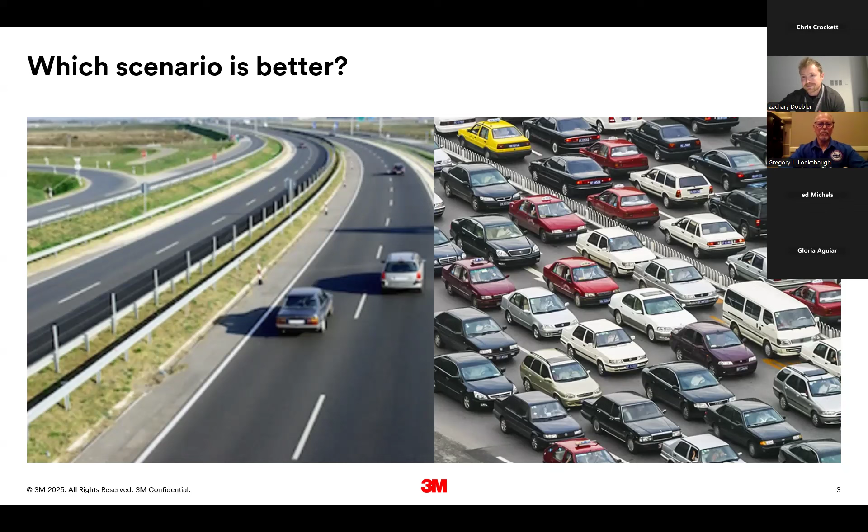So the takeaway there is that traffic has a lot of synergy to chemical management. I've had the opportunity to travel the country over the last month and a half in many different parts of the country, and traffic specifically is something that resonated with me and this topic of chemical management. Now, this picture's fun, more just to get a chuckle out of the audience here.

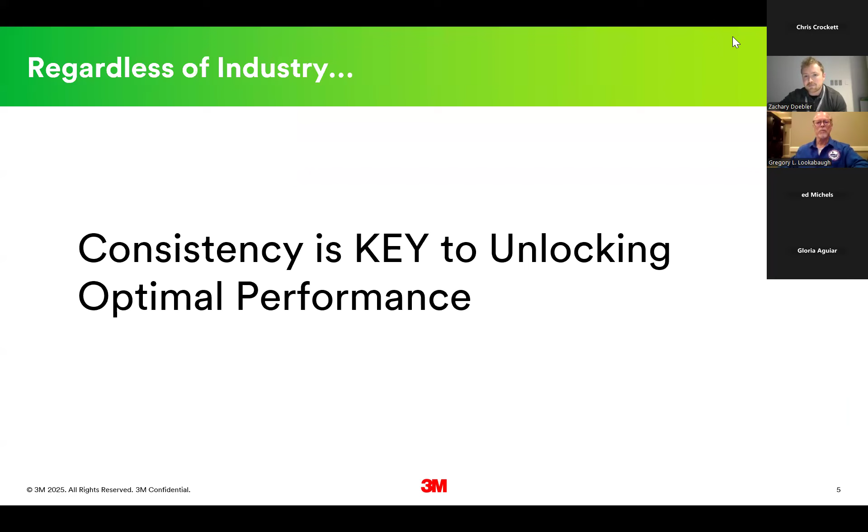When we impact water pressure, things happen. Performance changes. So ultimately, I have this noodling in the back of our mind. Consistency is key to unlocking optimal performance. No matter the solution that you have, no matter the operation that you're experiencing, consistency is key. And so when we're talking about chemical management, we're talking about cleaning. We're talking about cleaning chemicals and disinfectants, another big hot topic.

From our perspective, the manufacturer's perspective at 3M, and from an application engineering perspective of going to talk with your customers and learn what's working with them, we're constantly hearing that they're getting inundated. Customers are getting inundated with, here's the new disinfectant. Here's my more effective cleaning product. Here's my more sustainable solution. Oh, this product's going to be improving your handling or your experience. We're also hearing there's a lot of labor challenges.

Now, these are all great and dandy, and by human nature, new is something that we're always going to gravitate towards. Improved, those are just kind of trigger words in that instance. And in some instances, we do need new and we need improved solutions. But I would like us to all consider when it comes to cleaning, when it comes to chemical management, why are our current solutions not meeting our needs?

Now, when we think about the current solutions we're using, why are we using them? The soils that are out there today, I guarantee, are the same as they were a decade ago. The dirt is probably similar. The soap scum in your bathroom, probably similar. The mineral scale is probably similar. The cell structure of the microbes that we're experiencing on this earth, they're most likely going to be very similar. So why are our current solutions not meeting the needs? Why is my floor cleaner not cleaning as effectively as when I was sold on it or when it was showcased to be working?

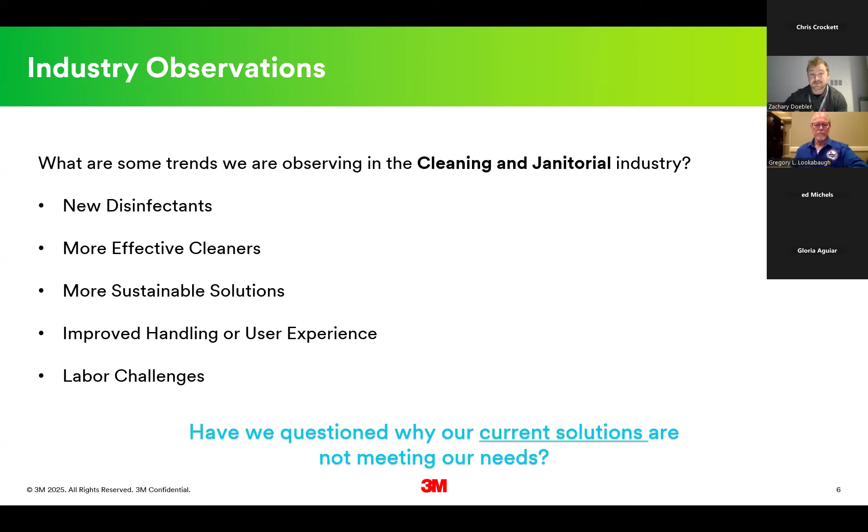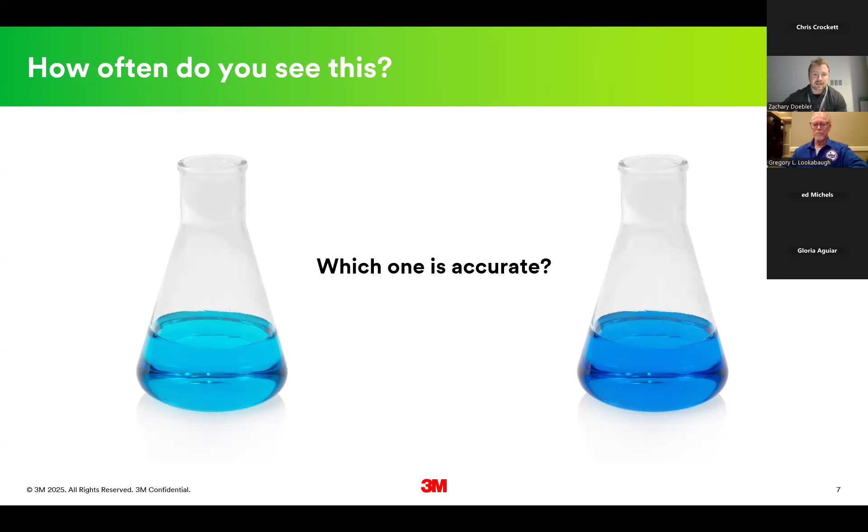Qualitatively, by the naked eye, we know something's not right. We know something's not being influenced correctly. And most likely that's related to the accuracy of your chemical management system. It's not working the same on day one as it is day two, as it is day three, as it is down the road or a year later. And why is that the case? We need to understand, and it's something that we really like to advocate for our customers, that the accuracy of your diluted solution is your key to success.

If you can control and have an accurate dilution, you can plan on the spending, the procurement, the yield of the chemistries you can have. Your compliance, you're going to have that peace of mind that you're going to be meeting those EPA specifications to kill the germs that are needed. Your efficiency is going to be planned. It's going to be improved, because you can plan on that product working as it did when it was sold to you.

And from a sustainability perspective, you're not wasting chemical. You're not having to use too much. You're not having to use too much water. Maybe you're not going through as much product, so you're reducing the carbon footprint of shipping product into your facility or bottles in the environment. Accuracy is so important when it comes to chemical management.

Your chemical management dispenser, if we had to compare it to an employee, it's an employee that you want to show up. It's an employee you want to do its job. You want it to work appropriately. If that employee didn't show up and did a job that was half of what it was supposed to do, you'd have problems. You'd consider, why am I having this person in my facility?

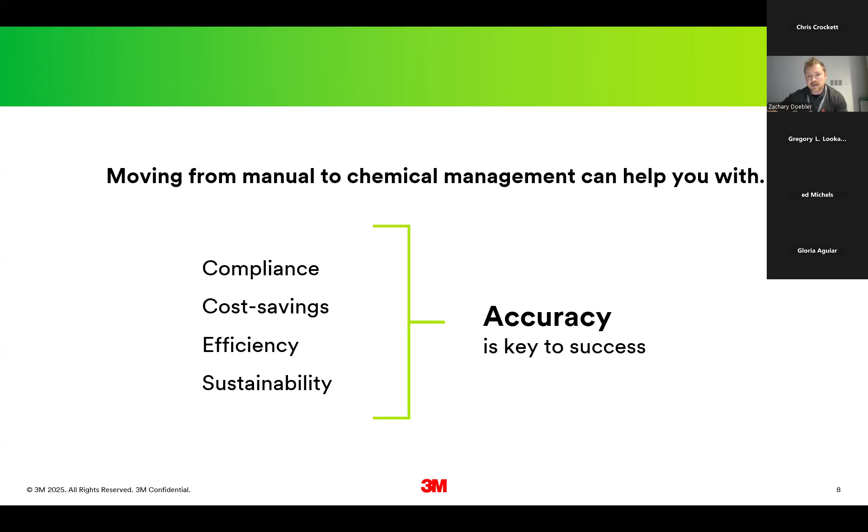If we think about that methodology with your chemical management system, the same spirit is true. At 3M, we're really of the mindset that if your solution's not diluted appropriately, what's the point? You could pay the surgeon the most money in the world if you're a healthcare institution, and they could be doing the best job they can. But if they're not cleaning appropriately, again, what is the point? And a lot of that comes back to your diluted solutions need to be at that proper prescribed dilution or concentration in order to clean that facility for you.

Now, there's things working against your chemical management system. There's things working against us when it comes to cleaning. The spirit of chemical management: one, avoid direct concentrate exposure, and two, control the dilution so we don't have that junior chemist mentality happening within a facility. We want this dispenser to deliver a diluted solution so you can worry about cleaning your day to day and not what or how much do I need to put in here.

Now, I mentioned there's factors that are going against us here, and the biggest one is water pressure or water flow. So the building design, the location of the dispenser in that building, your water source, the age of your plumbing, distance to the water supply, the capacity of your building, how many toilets are being flushed at one time, or how many sinks are being turned on. All of these things can impact your water flow.

Now, if you've been in a hotel recently, you're definitely going to know this, but even at home, when you're in the shower and you notice that water flow or water pressure change, it's pretty frequent. And sometimes it can relate to temperature change. It can relate to a difference in opinion or a difference in experience.

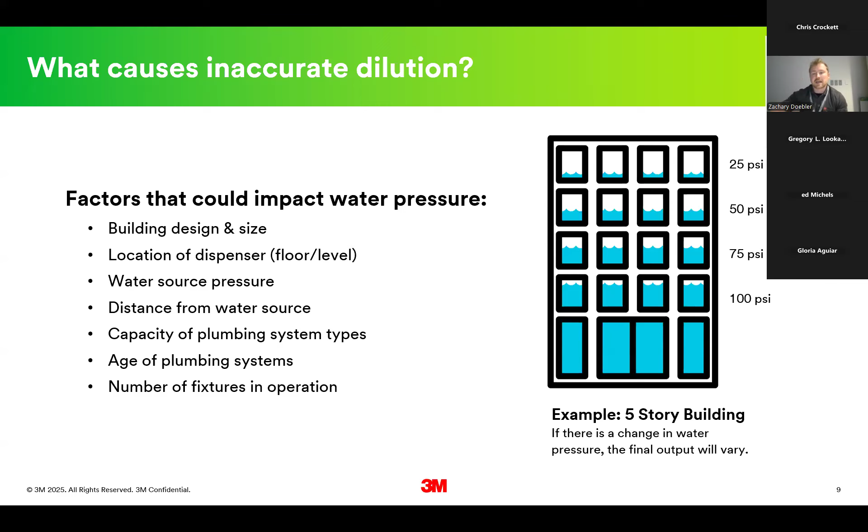But this is real. The one big thing to take away is that water pressure is something that we really can't control, and by minute, by day, by time of the day, and depending on the factors that are influencing your water pressure, it can overall influence your chemical management system. So these are things that we can't change. We need to accommodate for them.

Depending on how that flow is changing, you get two different phenomena. One is over dilution, so too much water, or under dilution, too much chemical. So if you're experiencing a situation where you have over dilution, most likely there's going to be a potential for a decrease in efficacy of your cleaning solutions, whether that is in performance or if it's a disinfectant or sanitizer, not quite meeting that EPA level or specification to kill germs. That is the really big scary piece to that.

You could also be influencing a situation where you have ineffective cleaning ability. So you have too much water in your solution. So you're going to come to that moment of, oh, maybe I need to clean this surface again. Why am I purchasing these expensive cleaning products when it's mainly water? So these types of situations do arise.

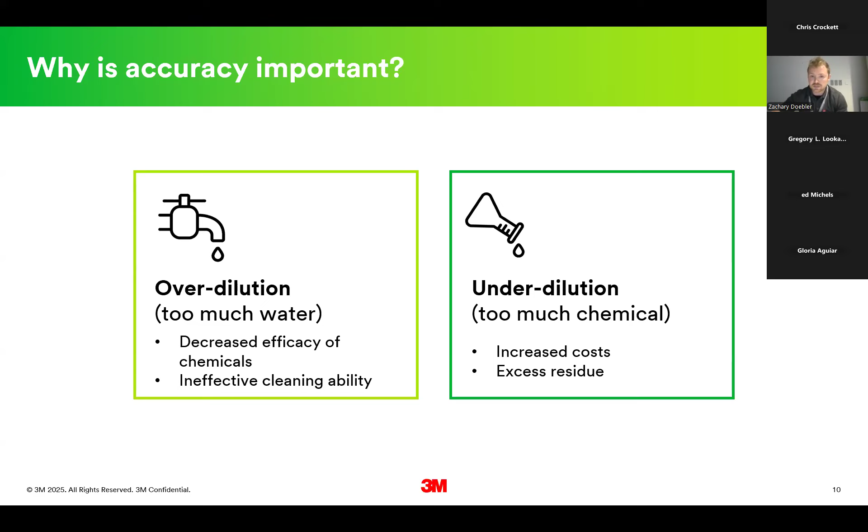Under dilution, so the other side of the coin, is too much chemistry. So increased residue is a big one. Surface damage, safety. The concentrate is more so what you're closer to now than the diluted solution when you look at that SDS. And then ultimately that increased cost. You can't plan on how much chemical you're going to use. You're going through it at a much quicker rate. Thus, you're going to be spending a lot more money in your facilities day to day to accomplish a task. This is huge, and it doesn't matter the vertical, whether it's education, healthcare, or hospitality.

So I was mentioning this, the results of over dilution here, so that too much water, not meeting that EPA specification, the amount of re-cleaning that you're going to have to do, and then ultimately the cost, the labor that you're going to have to re-clean or do things more often than you expected.

Under dilution, these are real life examples of looking out in the real world of chemical incompatibility. So something could be going on here of using the wrong product in the wrong spot, or it could be that you're using a product that was inaccurately diluted. It's too concentrated, thus giving you these results and making irreversible damage to your surfaces.

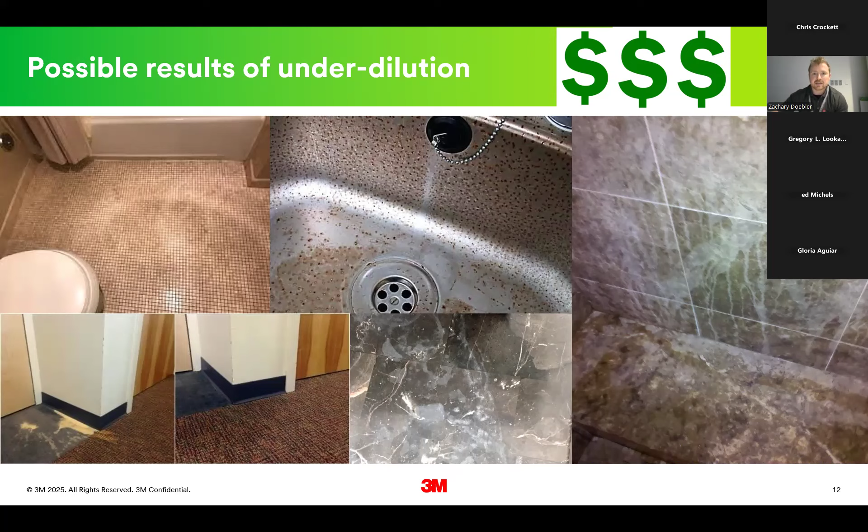But beyond that, it's that increase in spend, whether it's replacing that surface, having your employees clean more often because they have to remove that residue. So cleaning things two times versus once, or ultimately using too much chemical, having to replace it in your facility. So this over and under dilution factor is a really big deal. When we're talking about the under dilution factor of that being too much chemical in your diluted solution, you're moving closer to that concentrate. Now, I love analogies. I love pictures.

It helps me learn. It also makes it just more real to situations. And you might be thinking, okay, Zach, I get it. Under and over dilution are issues. But why are you showing me peppers? What is the focus point on that?

Now, if you were an alien coming to this planet and you had no idea what these vegetables were, and you just knew that a pepper in this instance was a red vegetable, if you bit into a habanero versus biting into a bell pepper, I guarantee it'll be a much different response. Now, the pH profile of the bell pepper is around 6.2, so we're going to round that to 6. Habanero pepper, 4.9-ish, so we'll round that up to 5.

Now, when you're thinking about the pH scale, I'm pivoting to the pH scale because it's so important. When you're looking at a new chemistry to bring into your facilities, I encourage you to look at the pH. The pH is a very simple way to understand, from a compatibility standpoint, what we're dealing with. It's one of the first steps to evaluating a new chemistry in your portfolio, and as application engineers, it's where we look to first as well. But understanding that pH scale and how close you are to different levels can help you understand the corrosivity or caustic nature of those solutions.

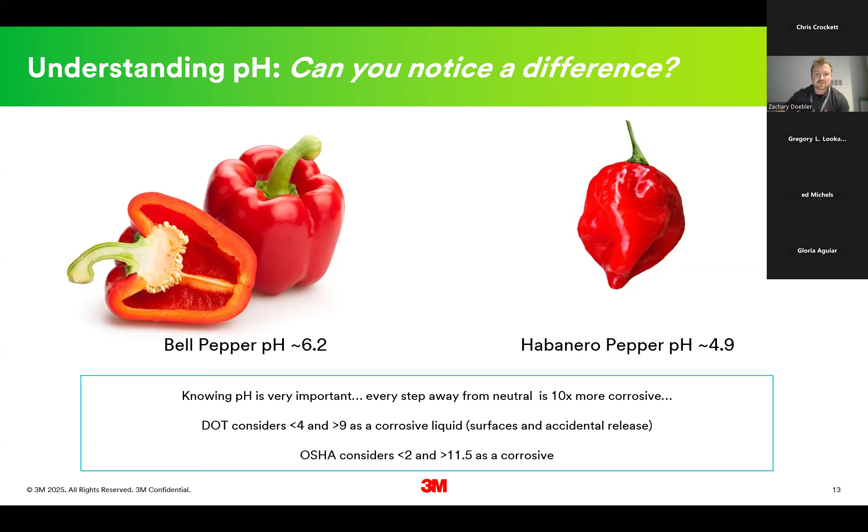And so with that in mind, we're talking about chemical management today. The reason you chose chemical management in the first place was to get away from handling the concentrate. Concentrates are concentrated so that you can have a higher yield, a solution that goes further once you dilute it. If you are under diluting, so it's way more concentrated than it needs to be, you're closer to that concentrate pH. Thus, your surfaces are going to be exposed to an unintended solution that could cause surface damage. And even if it's 1 pH, like the peppers example, you could have different results.

So another big factor in chemical management is how do I validate my diluted solutions? How do I know if something is diluted appropriately? The first thing we naturally do is by visual, a qualitative viewpoint. So when we look at diluted solutions, we think about color, we think about volume, we think about suds. That's kind of how we qualitatively reason with our diluted solutions.

Okay, today it looks about the same color as it did yesterday. Or maybe today it doesn't look like the same color. Or maybe I'm filling up this bucket faster. In the lab here at 3M, we have a device to change the water pressure that dispensers are experiencing, and with that we can ultimately see how accurately these dispensers are diluting.

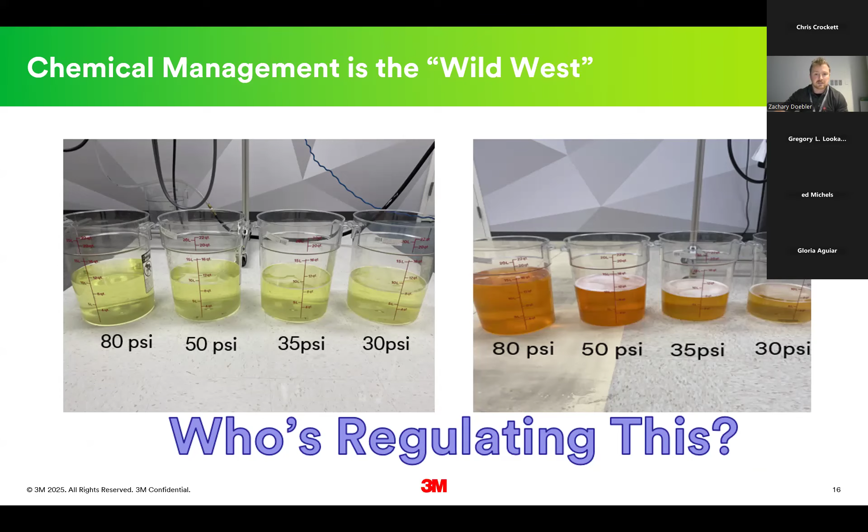That's why we encourage our customers, we want to empower our customers, that when they're going into a discussion related to chemical management and picking those chemistries to utilize within your facility, make it a priority to evaluate the dispenser, because that dispenser is equal to or more important than the chemistry you're bringing into your facility. Because if it's not working, your diluted solutions aren't working.

So historically, when we're talking about disinfectants specifically - those are the ones closer to our heart, killing those germs, keeping us clean in our facilities - microbial control is definitely the area of higher scrutiny, especially in education and healthcare. And there's been two methods on the marketplace in our industry for testing those solutions and whether they're working appropriately.

So one of those is test strips, and QAC test strips are a very common one. You have a strip that changes color once you dip it in the diluted solution, and you compare that strip to a scale or a key on the side of the bottle of these test strips. The issue with these - I'll start with the positives. The positives: it's quick.

You'll almost instantly know based on that color change what you're going to be comparing to, and you can have a result that you can put in your folder as your audit is being conducted. But the negatives to that are it's very subjective, and they're also not super accurate based on the scale. I know one of my colleagues here is Ed, and if Ed was looking at this test strip and it was supposed to be brown, maybe he sees one shade of brown versus the difference that I see. So it's all dependent on how well you see color and how well you compare to the key on your device or test strip. There's definitely some nuance to that, and a level of subjectivity you need to account for as a facility.

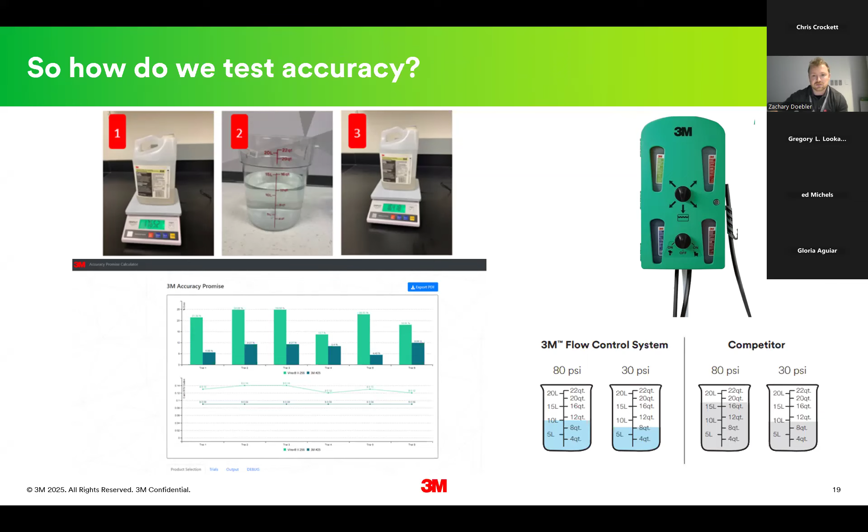This methodology can highlight the real reason why 3M is in the chemical business and what our merit is to our chemical portfolio. So our dispenser is called the 3M Flow Control - and the reason it's called Flow Control, we're not super creative with our names, is we're controlling the flow of water to each of those chemicals, each of those quadrants in the cabinet. By maintaining a consistent flow of water, we can ultimately control your dilution and give you a more accurate dispensed solution. By utilizing flow control technology, we are 55% more accurate than the next competitive system on the market.

So now hopefully it's kind of coming together, coming full circle.

So why did Zach talk about vehicles? Why did he talk about gas mileage? And why did he talk about the dog trying to drink out of a hose? Now, stop and go traffic.

Gasoline engines operate via Venturi technology as well. By not consistently allowing gas into that engine, or thinking about that dog in the hose, by having extreme water pressure, he or she can't accommodate for that water flow. Thus, you're going to have an inaccurate level of gas mileage, an inaccurate understanding of when I'm going to need to pull over and get gas, or for the dog, an inaccurate level of how much he or she can drink in that situation.

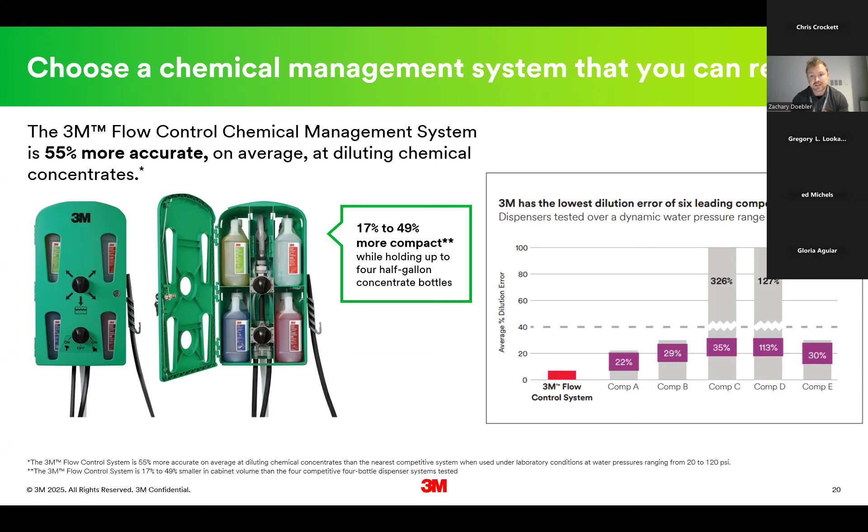We understand that this claim of 55% more accurate is large, and it's a bit of a concern to our competitors too - it's like, how can you make that claim? Well, we've tested against all the leading competitive systems on the marketplace, and what we've realized is that even within the pressure ranges they advertise as appropriate, there are inaccuracies. It all relates to the changing water pressure. We're not accommodating for that change like we should, so we're getting inaccurate dilutions at the end of the day.

So at 3M, we have these claims, we're saying this - okay, sweet, Zach, I believe you. There's a lot of studies coming out there too, and this one specifically came out in October last year. The Cleveland VA Medical Center did a study of automated dispensers, and what they learned is out of the 10 hospitals they looked at, 9 out of 10 of them weren't working. They observed inaccurate diluted solutions, disinfectants not at the level they need to be, and disinfectants with no disinfectant in the diluted solution. And this is healthcare - quite scary.

There is a need for regulation around chemical management, and there's a need for facilities - whether you're education, healthcare, a theme park, it doesn't matter - to understand that your dispenser is the most accurate piece to your chemical management portfolio. Because if it's not working appropriately, what is the point of your diluted solution?

Now, fun fact in this study itself, and it speaks to flow control technology in action - Hospital 5 in this study, the one utilizing flow control, was the only one with expected concentration of disinfectant, at the level needed to kill germs per the EPA label. It's alarming, and it's the reason why there needs to be technology in your dispenser to accommodate for the ever-changing water pressures.

Now, this specific study has led to the adoption of a mandate across VA medical centers countrywide. All of them now have to audit their automated dispensers to make sure they're working appropriately, and if not, they have to have an action plan in place. So if I had to look at my crystal ball, this is a trend - it's a start, and it's a very valid reason for dispensers and automated dispensers to be audited and to make sure they're working appropriately, accommodating for the water pressure that we can't control.

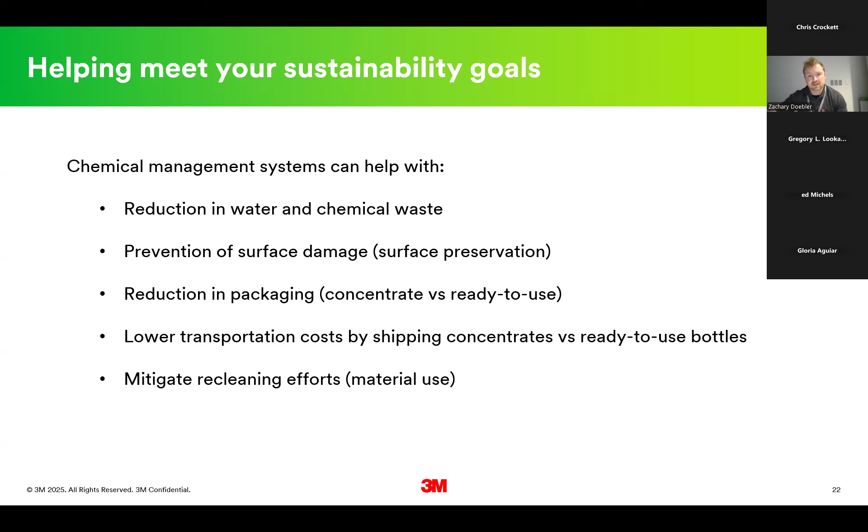When your chemical management system is working appropriately - reducing the amount of water and chemical waste, preventing surface damage and equipment replacement, reducing packaging or how many cases or bottles of product I need in my facility, and lowering the carbon footprint of transportation into facilities - you can harness that sustainability message and footprint with a chemical management system that is working for you accurately. So chemical management, as I bring this to a close, is super important, and the results of an accurate dilution can yield great benefits for a facility.

And it's honestly the first place that we should have facilities look when they have that question. I need to reduce spend, or I'm having a hard time with my labor. I need some innovation to reduce my labor dependency, or I'm seeing my surfaces result with more residue or look dirtier over time. The quick and easy way, or the first step, should be looking at your dispenser. How is it working for you?

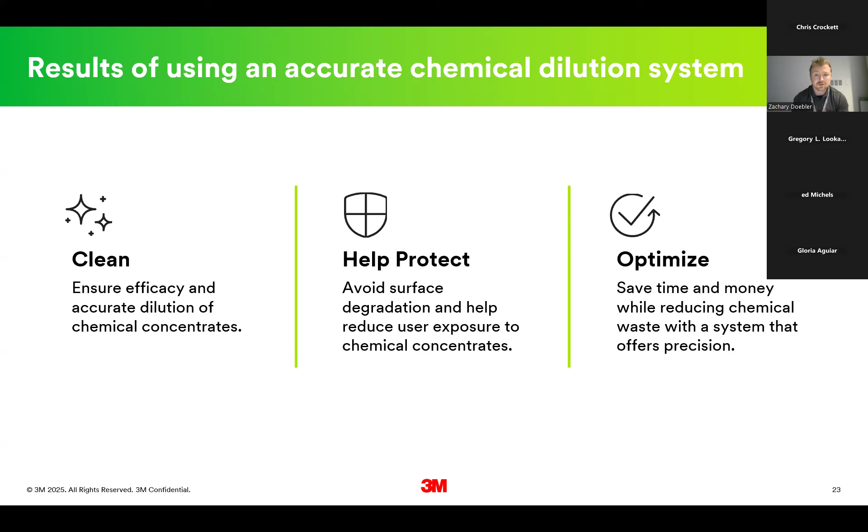Because that's what's delivering those cleaning solutions, whether it's disinfection, floor cleaning, degreasing, bathroom cleaning, glass cleaning. That's what's delivering those solutions for you in your facility. And if those aren't diluted appropriately, you're either moving closer to your concentrate SDS, so really caustic, or more so concentrated, or you're moving to the other end of the spectrum of closer to water where you're going to have to re-clean. So the big goal behind this presentation today was to understand that chemical management is so important, and we need to spend more time evaluating it.